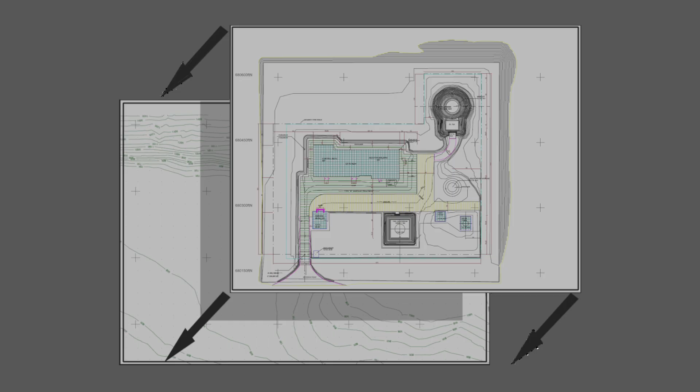We begin by importing and scaling the first plan. Go to Plans, Add PDF, and browse for the file you want to import. Then we need to ensure that the PDF plan, which could be your existing plan like I have in this example, is correctly scaled. We can see that we've got a scale here, which is a ratio of 1:80, or we can also see that the distance between the grid points is 150 feet.

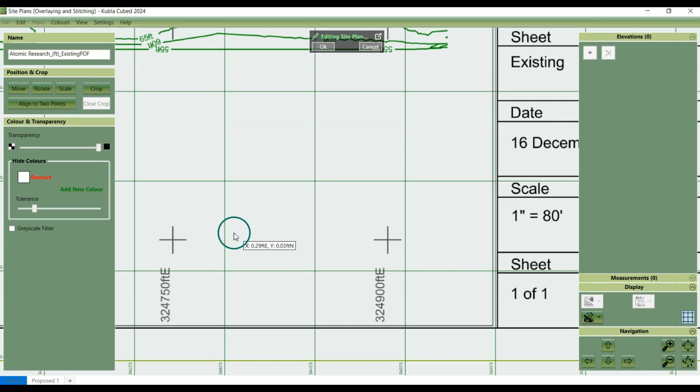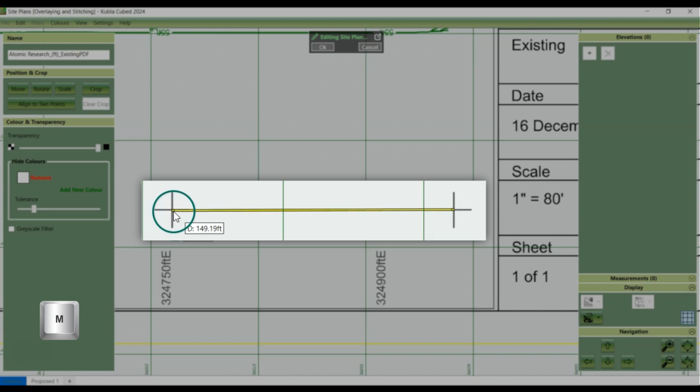We could use that known length to scale by length, but on this occasion, I'll click Scale and we'll scale by ratio. So just type in 80, and we can double check that it's been done correctly by holding down the M key and dragging our cursor from the start of a known length to the end of the length. And there we can see on the cursor that it's 150 feet. So click OK.

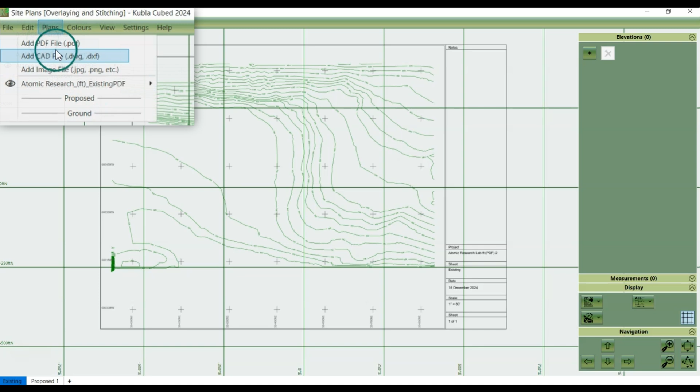It's essential for laying the foundation for future alignments to get this first plan correct. Once the first plan is in place, you can then add the second plan and make sure that the scales match. We add our second PDF, this time the proposed, by going to Plans, Add PDF, and Browse. Once we've done that, we can then see the two plans in the model view.

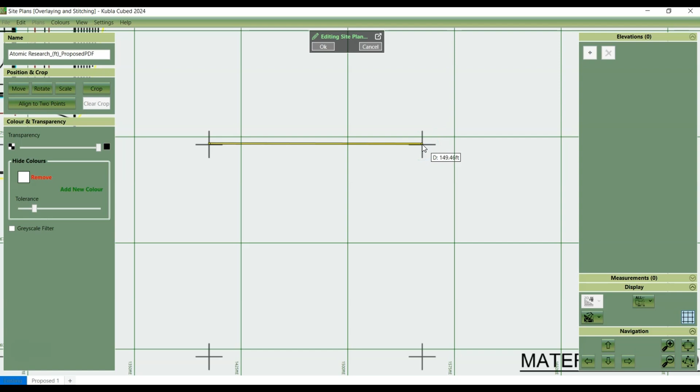We need to double check that this second plan is correctly scaled by holding down the M key again, and that looks okay. But if we want to be sure, or if the scales don't match, you will need to scale it. We can just add the ratio in again. This one's also 1:80. Now we have both plans scaled correctly.

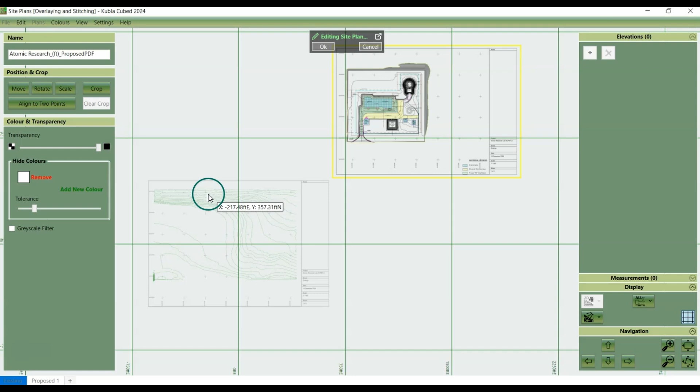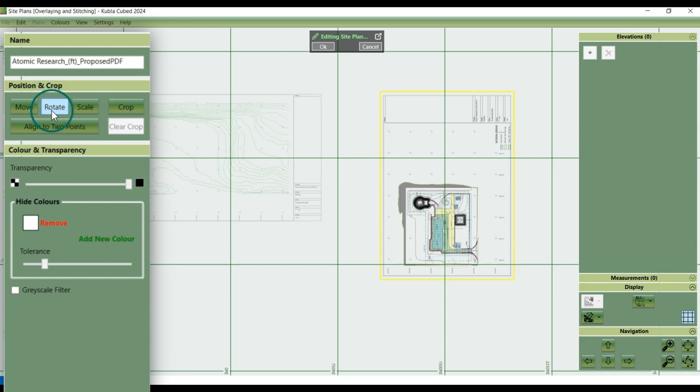On this occasion, we're going to overlay one site plan on top of the other, so we want to overlay the proposed onto the existing contours. There are two options to do this. If both plans share the same orientation, like these two, you can simply use the Move tool to align them. But if they have different orientations, you'll need to use the Align to 2 Points tool. This feature will move, rotate, and scale all at the same time to position the plan.

To move the plan, let's go to the Plans menu, and we want to edit the plan that we're moving. In this example, the proposed contours plan. So click Edit, and then select the Move tool.

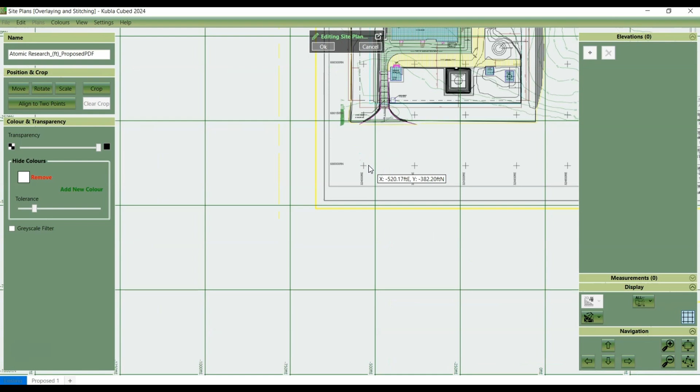We then click on the point that we're going to use as a base point, so we need to match this point on the existing ground site plan. Left click once on the plan we're editing, and then we can click a second time on the plan that it is being moved to. And there we go. Now we can see that the points have aligned and that our existing contours show underneath the proposed contours.

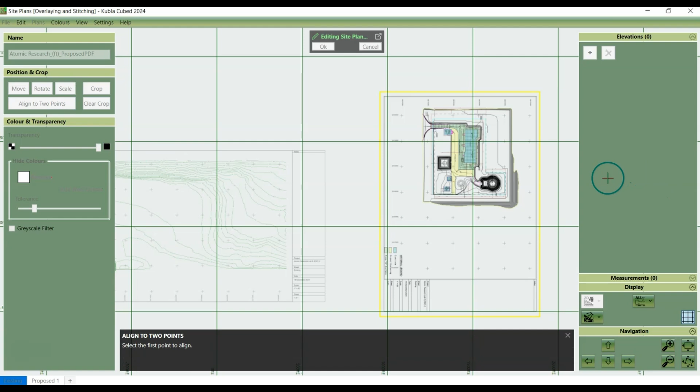For aligning to 2 points, we first want to go to the Plans menu and click Edit. Then select the Align to 2 Points tool. Click the first point that we want to move, so let's use the same one as before on the proposed, and then find the corresponding point on the existing plan. And then repeat this for a second point.

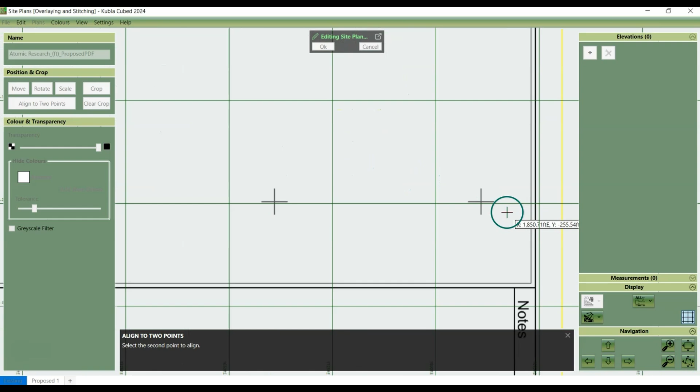It's good to have 2 points that are quite far apart on your plans, because then it gives a more accurate positioning.

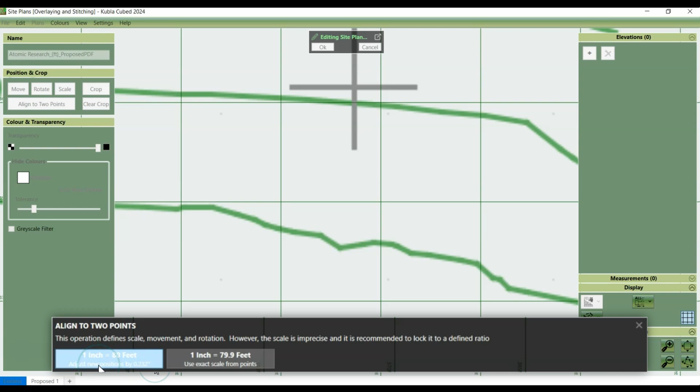When you're aligning to 2 points, it usually offers you 2 options of scale. My clicks were slightly off the 1:80 foot scale, so it gives the option to use the exact scale from the points I clicked, but we want the more accurate rounded figure of 1:80, because I know that's the scale on the plan. So let's click that one.

You can see that there's a need for a slight adjustment, so we can reposition it using the Move tool to slightly improve the alignment.

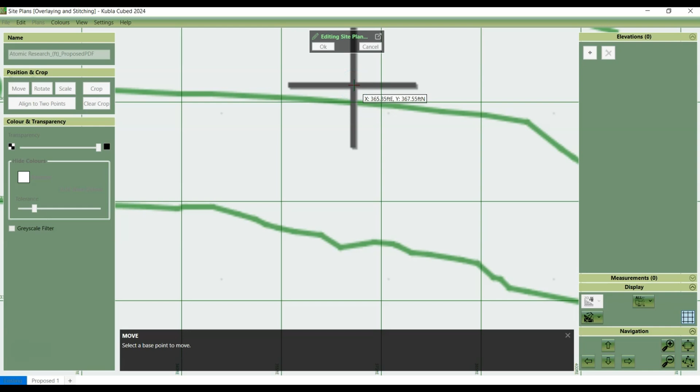Okay, so that's the alignment complete. If you want to, you can use the crop tool to remove any unnecessary notes from the plans, and you can watch how to do that in our video on cropping, colours, and transparency.

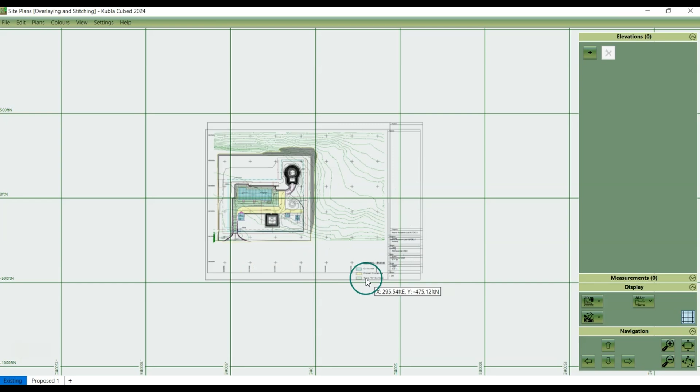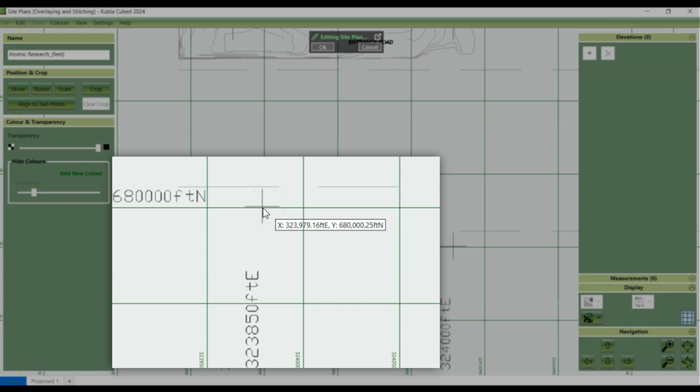When overlaying different types of file, for example CAD and PDF site plans, be sure to import the CAD site plan first. This is because CAD files are already scaled and positioned, so they will import into the correct coordinates on the project. You can check on the cursor and see that the position is based on these coordinates.

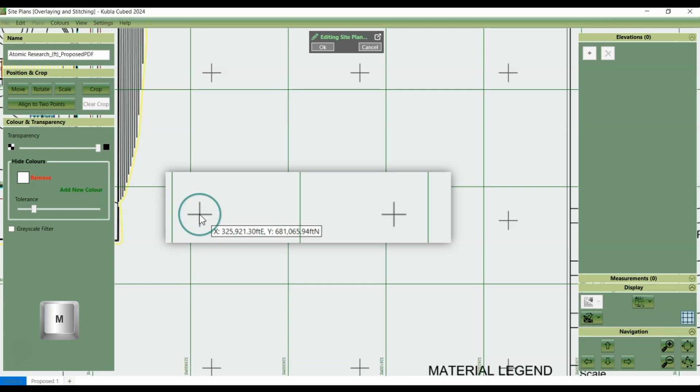So we add the existing ground CAD plan first and then click OK. There's no need to scale it, but we then add the PDF for the proposed site plan. We can check the scale and it all looks correct. The scale matches the CAD plan.

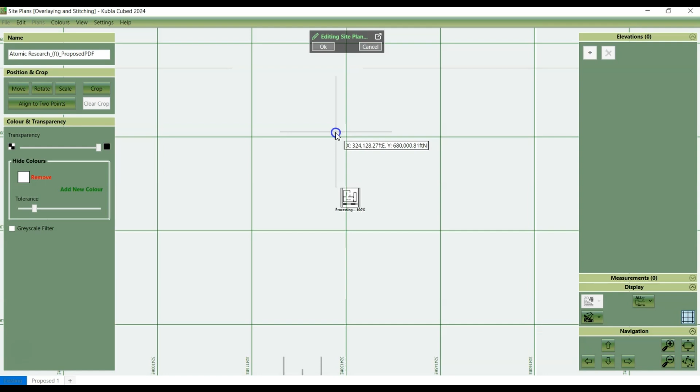Now we can use the Move tool to overlay the proposed plan onto the CAD site plan. Left click once on the plan we're editing, and then we can click a second time on the plan that it is being moved to. And there we are. You can see that the overlay is complete.

When stitching multiple site plans, alignment is crucial for creating a seamless view of the project. Let's walk through the process.

We'll start by adding page 1 of a PDF with 4 sheets to align. Just like with overlaying, we begin by correctly scaling the first plan. This serves as the baseline for stitching the other plans.

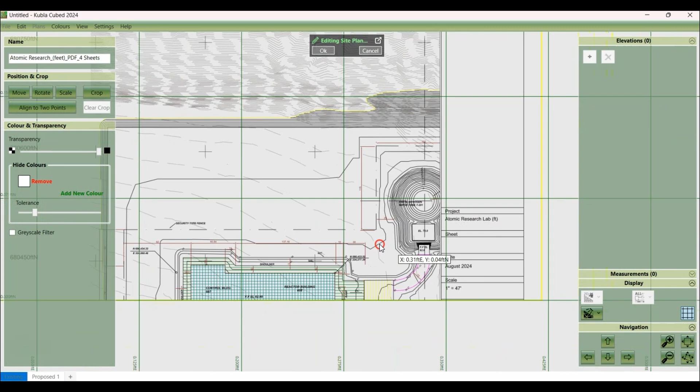If you have coordinates available, you can use them to ensure the plans are placed in the correct coordinate space. Alternatively, you can scale by ratio, or if you know the distance between 2 points or a known length, you can use that as a reference. For this example, we'll use the ratio method. And there we go.

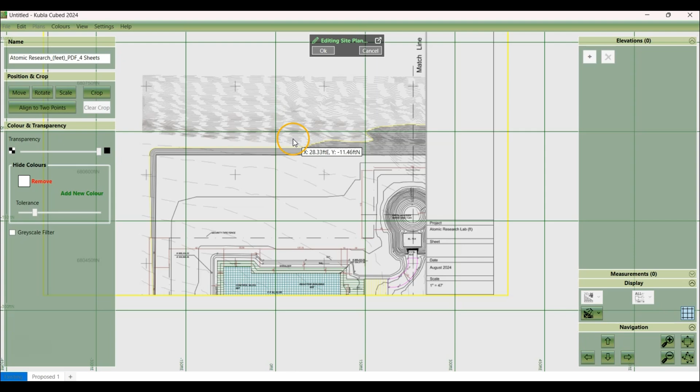Before adding another plan, we need to verify the scale, so hold down the M key and move the cursor across the 2 known points to check the known distance. And I can see that the distance is 150 feet, which is correct.

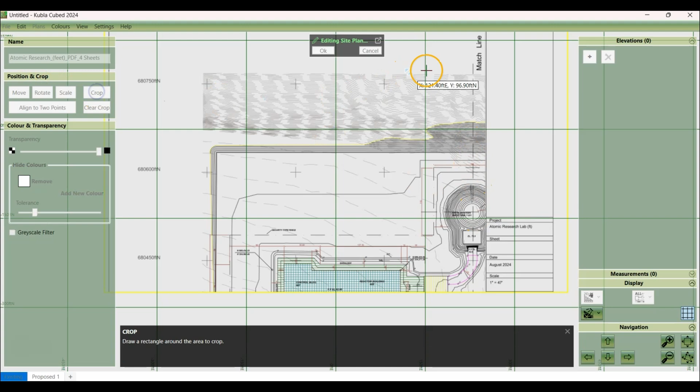I'll quickly crop the extra information I don't need. Our match line is here, so I'll crop just after it. And I'll rename this page Page 1, so that we can easily identify it later on to do any additional edits. Now we can add another plan.

So go to the Plans menu and then Add from PDF. Next we add page 2 and click OK. This plan should be scaled the same as the one we previously scaled, so let's double check.

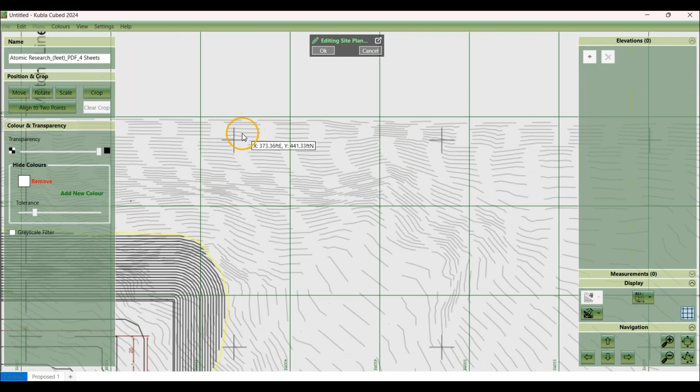These 2 points should be 150, but the scale doesn't look quite right. It's always good to check the scale for every site plan, as it may not have come in correctly, or it could be from a different project. So let's scale it in the same way we did before and check the distance again.

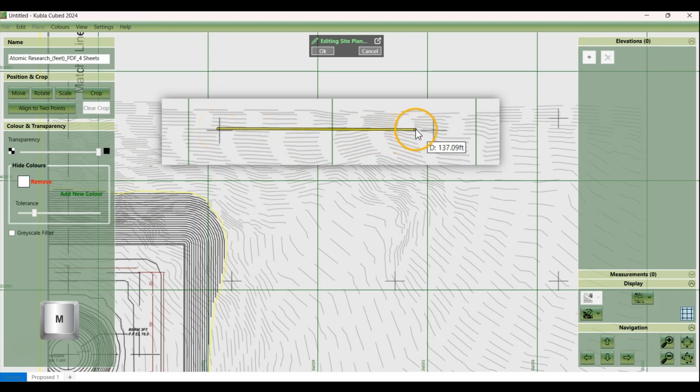You can see on the cursor that the scale is now correct. Next, I'll crop this plan as well. And we want to align it as close to the match lines as possible, but leaving a small gap.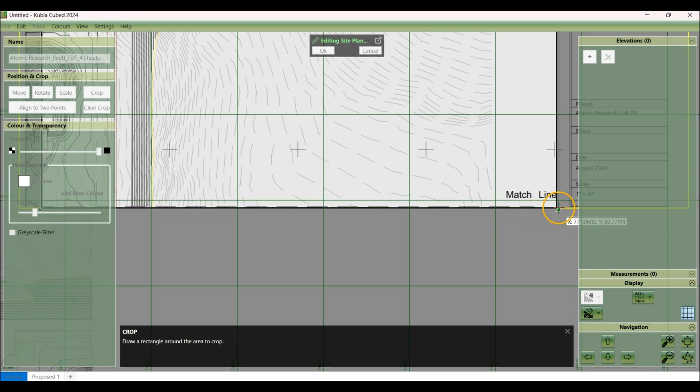Sometimes plans might not have the same orientation, so they need to be rotated. In these cases, we can use the Rotate tool or use the Align to Two Points, which will move, rotate and scale the plan to match the destination. We don't need to do that here, but we can move it into position.

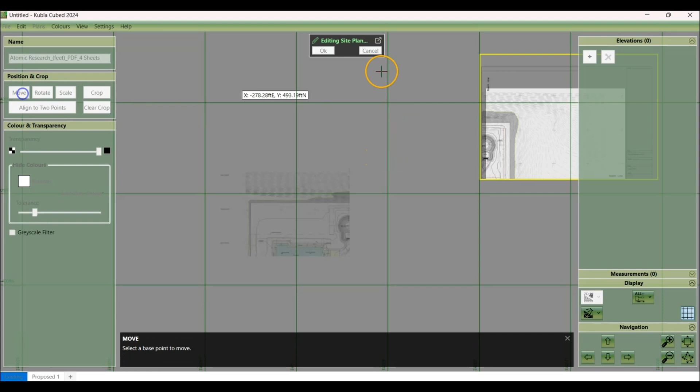To do that, we select the Move tool. I've clicked a point on the end of the match line, so I'll try to match the end of this line with the one on the other plan by clicking on the same point on the second plan. Since we've already scaled it, we don't need to adjust that.

And now I'll rename this plan Page 2. The alignment looks pretty good. There's a slight gap, but this is what we want, and it's important to leave a small gap when stitching plans, so that the software can automatically join them when we're extracting the data. Gaps are preferable to overlaps, so keep that in mind.

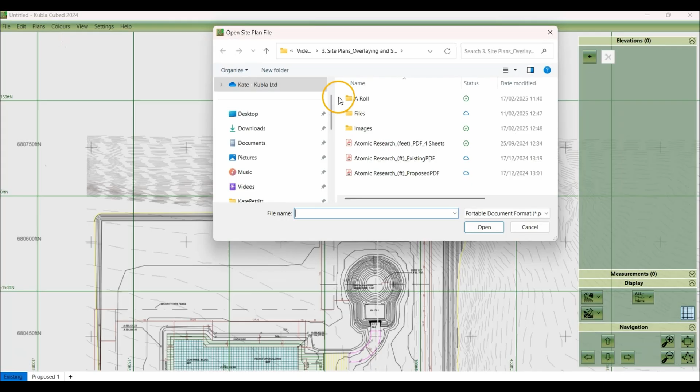And add page 3. For page 3, I'll demonstrate the Align to Two Points method, so you can see that as well, which will allow us to stitch the plans more precisely.

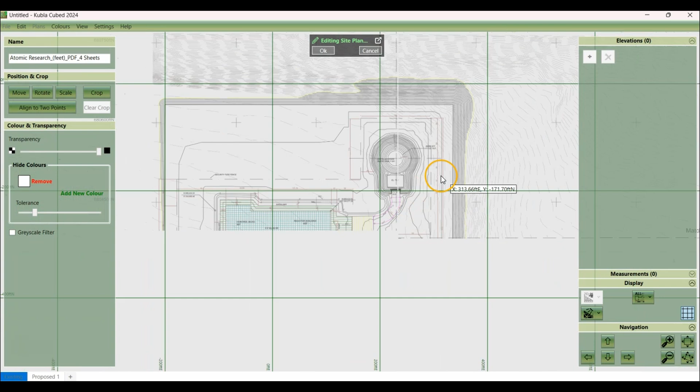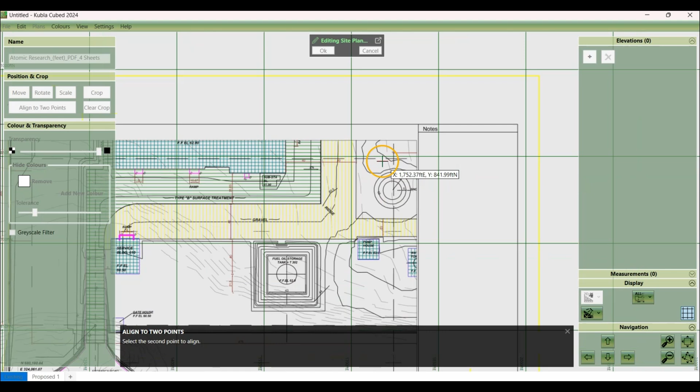The match line has been cut from page 1, but we can use 2 different but recognisable points on pages 1 and 3 to align. For example, some text or the corner of a building. Click Align to Two Points. So I'll use the corner on the letter F, and the second point I'll use is the arrow on this ramp here.

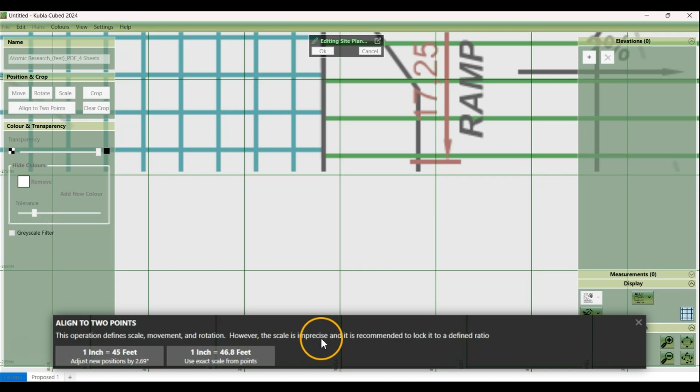With the Align to Two Points option, you get the 2 options of scale. This one is almost correct, but not exactly, so I'll go with the most accurate measurement. With your project, you may want to do your Align to Two Points again, so that you get a more accurate scale. And there you go, that's aligned, and now I can crop.

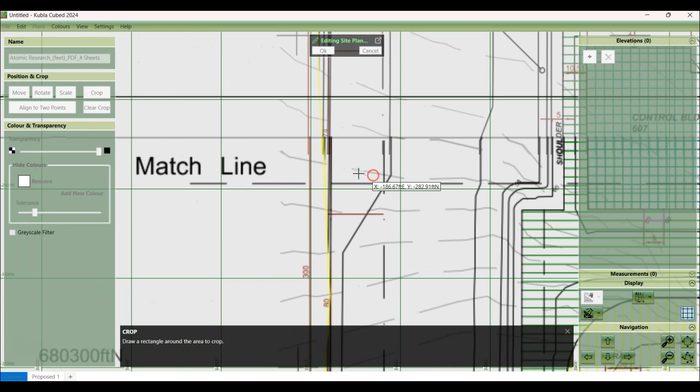So I'm going to crop from above the match line at the top, all the way across to the match line on the right. And then click OK. And I'll rename it page 3.

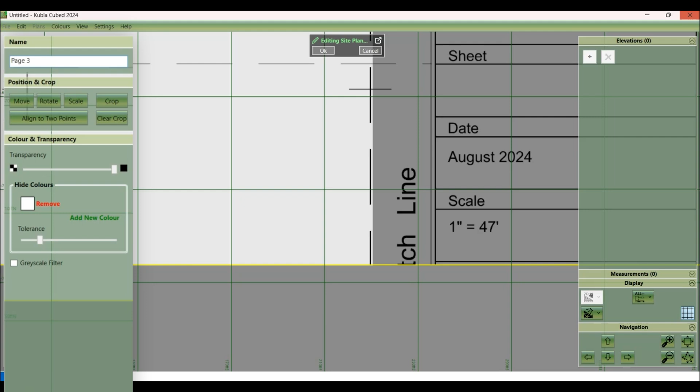The gap between the pages is quite large on this one, so I'll just reduce that by clicking on Plans and Edit, and then clicking on the crop line until it turns green and dragging it into position. That now looks great.

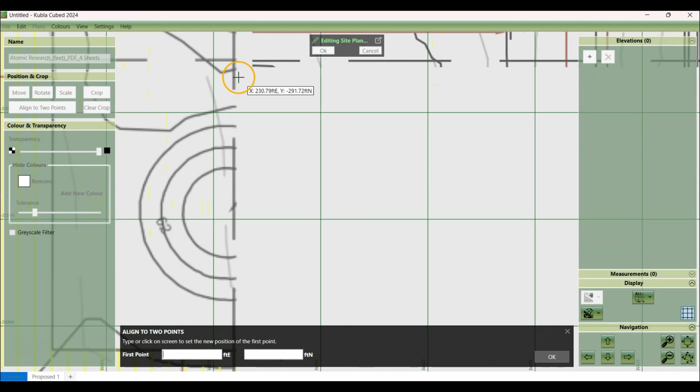With the final page, we'll use the Align to Two Points method again. So I've added the plan, and we'll align using the centre point and the end of the match line.

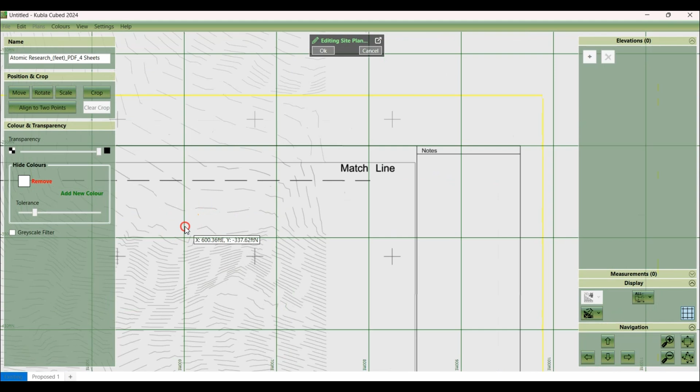Once that's done, we can crop this final plan, and this time I'll crop just under the match lines, leaving a slight gap between the plans.

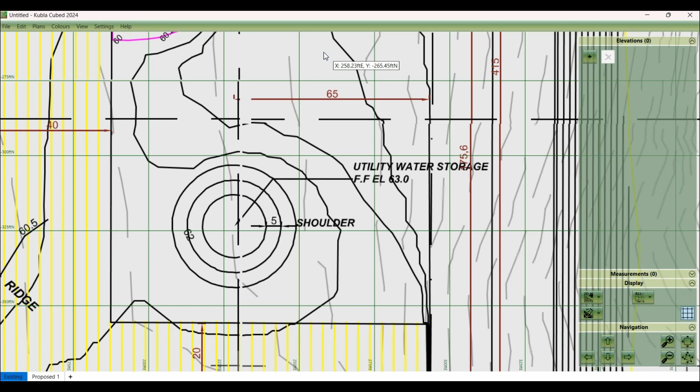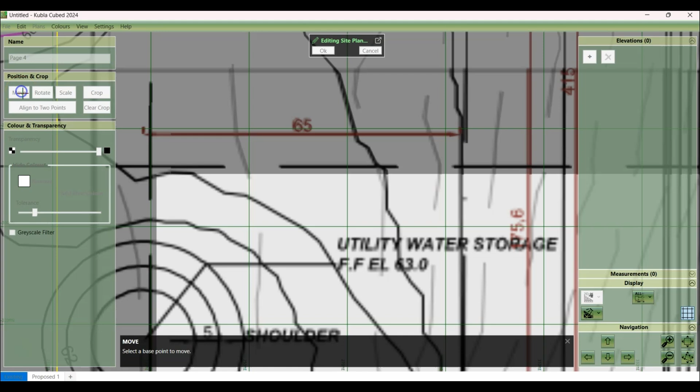The alignment looks almost there, but we can just first rename the page to page 4, and then click the Move tool, zoom into a point so we can accurately move it by clicking on the same point on both plans. And that's much better.

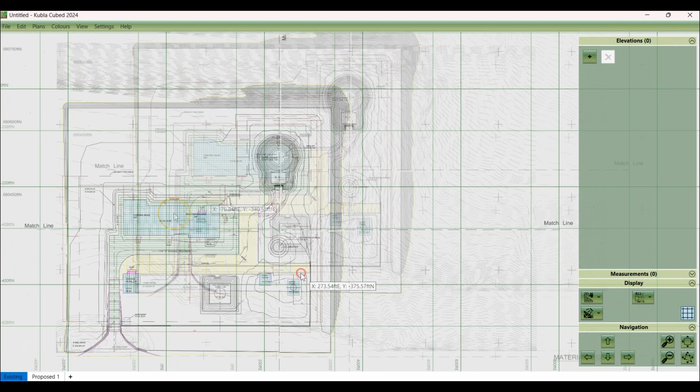And as you can see, we've successfully stitched together the 4 plans, which now form a single unified plan. So by following these steps, you can efficiently overlay or stitch multiple site plans, ensuring proper scaling and alignment for your projects.

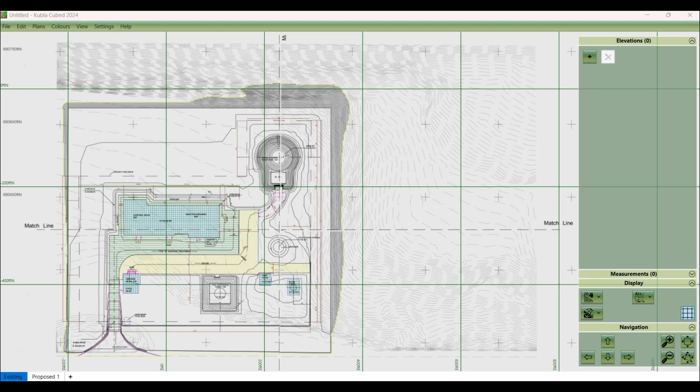We can now add the ground topography, and these aligned plans will allow us to extract the data from the PDF vectors, and any gaps in the contour lines should automatically join.